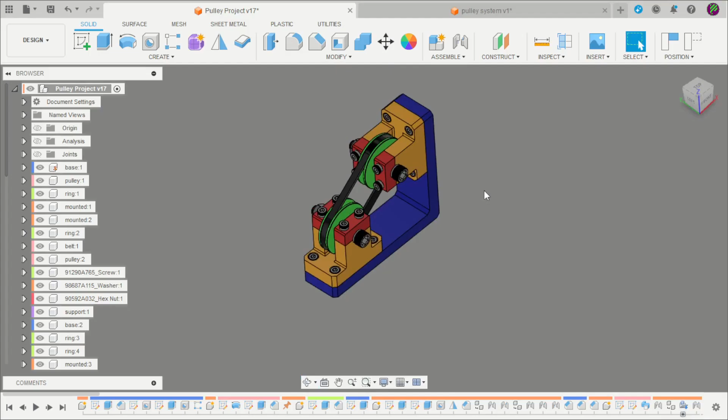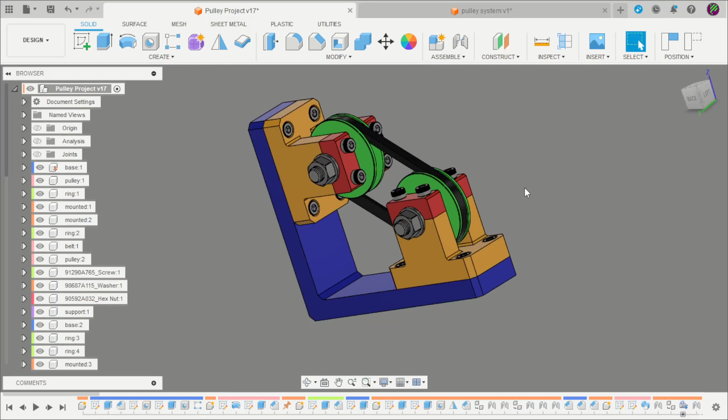This is the video of the assembly of this project. In the previous video I created all the components that we need for this project, and I will show you how to assemble all these components.

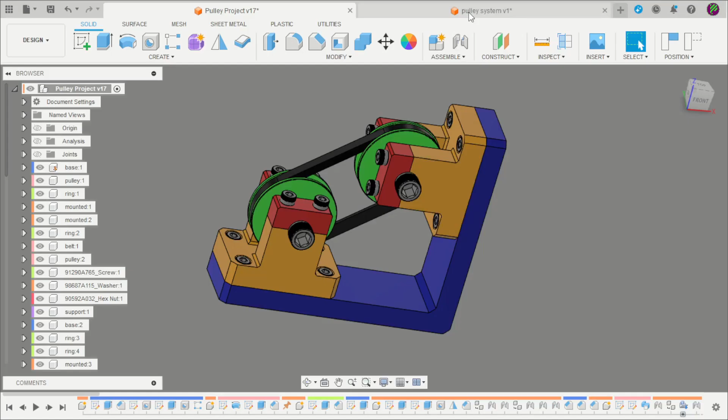Let's start. In the previous video, I finalized all these components and grounded the support here, the first link, here, with the right button, grounded.

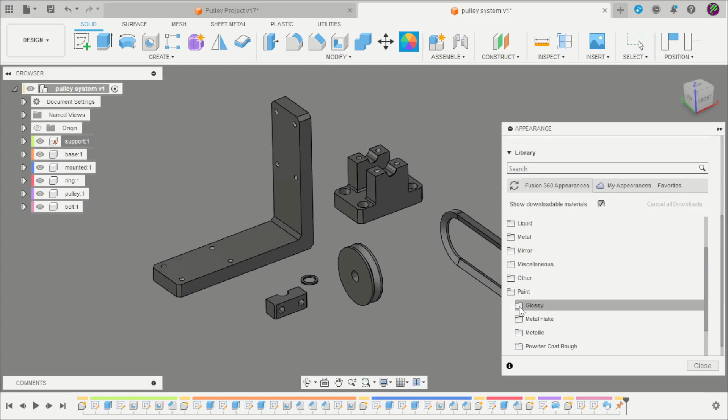Now we can start to add some colors to make it a little bit easier to identify the parts. We can apply some colors here.

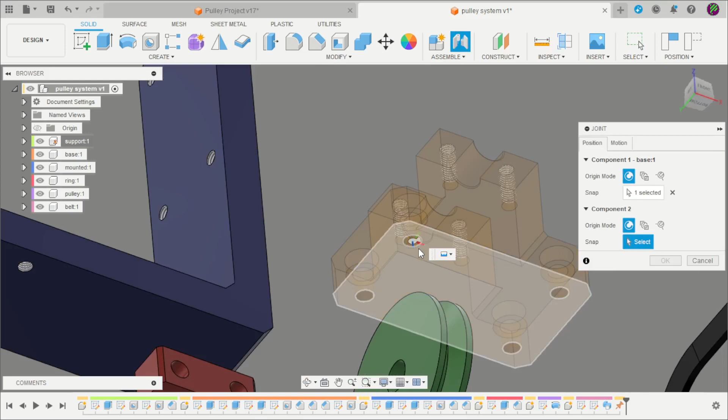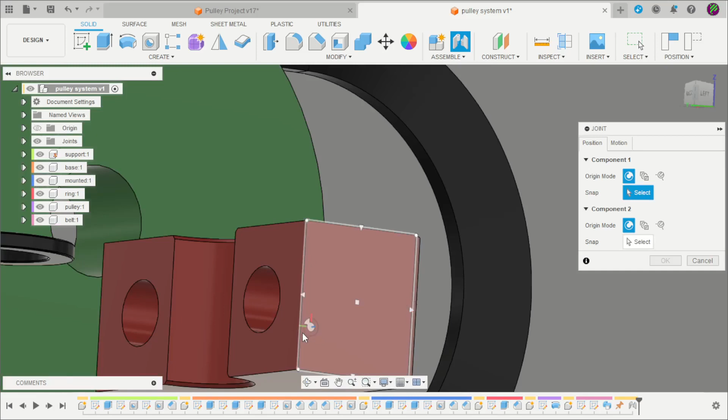Start with the base. Click here. Hold the control, click on the point, hold the control, and click on the point, the part will be moved. We need to click on this point here, hold the control on this cross, move that face and constrain.

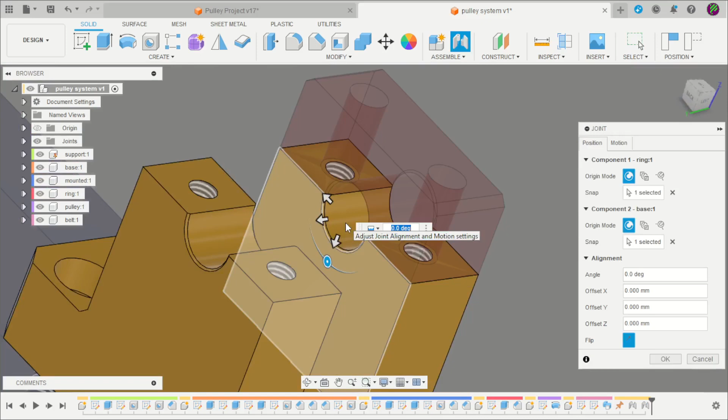This ring, another joint here and here. Click OK.

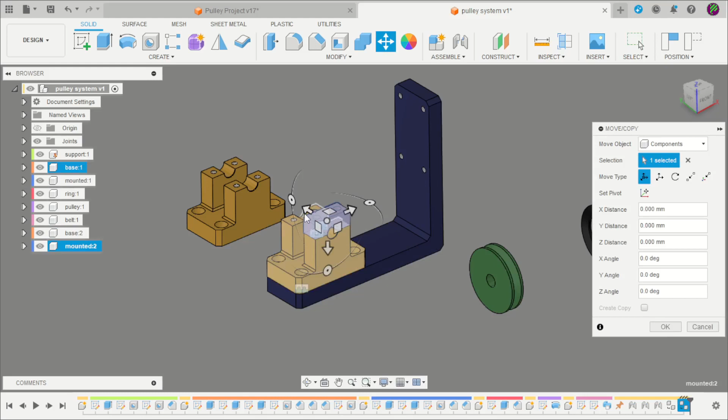Now we can start to create some copies to this product. The base, Ctrl C and Ctrl V, move. The mounted, Ctrl C, Ctrl V. For that we need more copies, two copies, a total of 4 parts. Ctrl C, Ctrl V, that's all the same part here.

The same for the ring. We need 4 of that. Ring, Ctrl C, the same process for all here, and the ring is here.

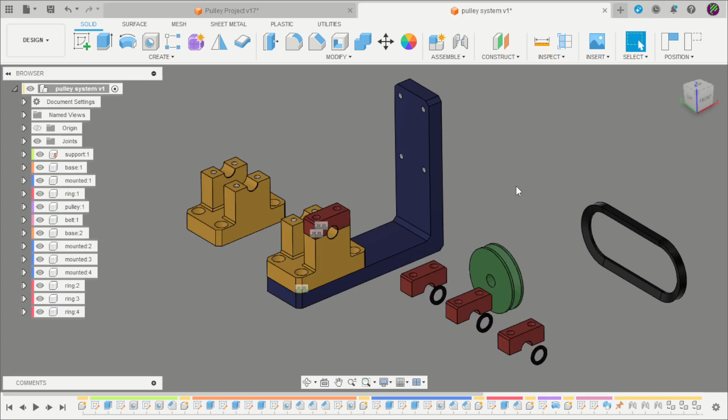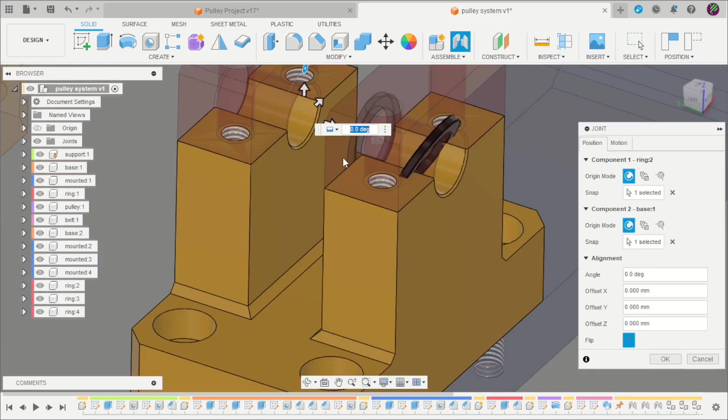Now we can finalize that with this mounted. Click on this point, always using the cross. Here. And here.

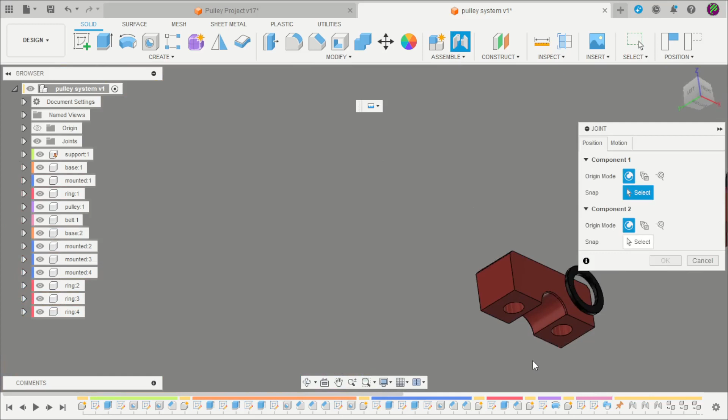Now we can fix that base here on the top. Here. Join all these mounted, using always the cross. Here.

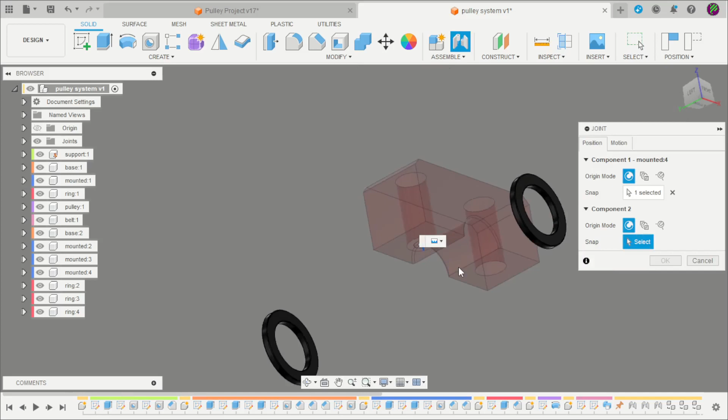In this case we can rotate. Here of the process, turn that as 180 degrees. The same for the rings, here and here.

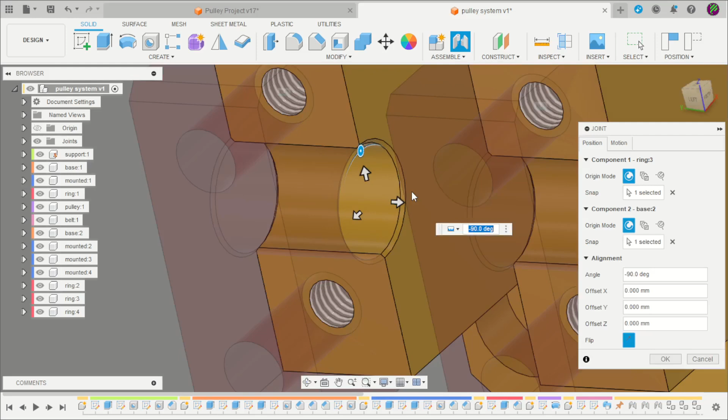And the last ring, let's see.

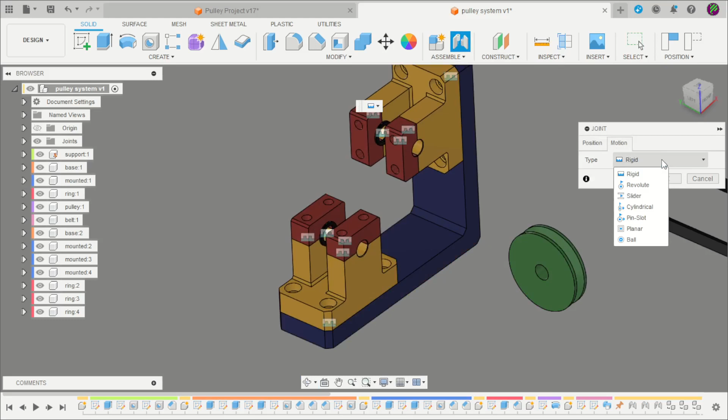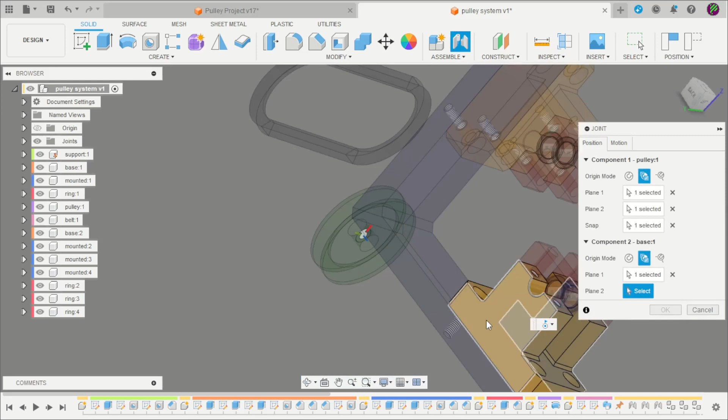Now for the pulley, we can change that to rigid to revolute, and between two faces, because we can select these two sides of the pulley and select the center point of this cylinder between two faces of the base, and click here and select the center point. Now we can rotate this pulley.

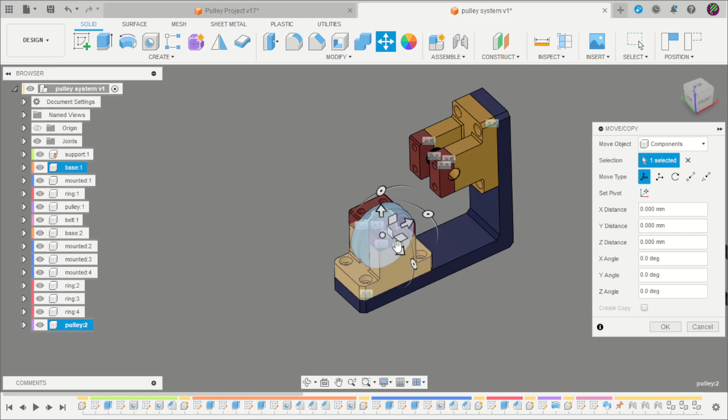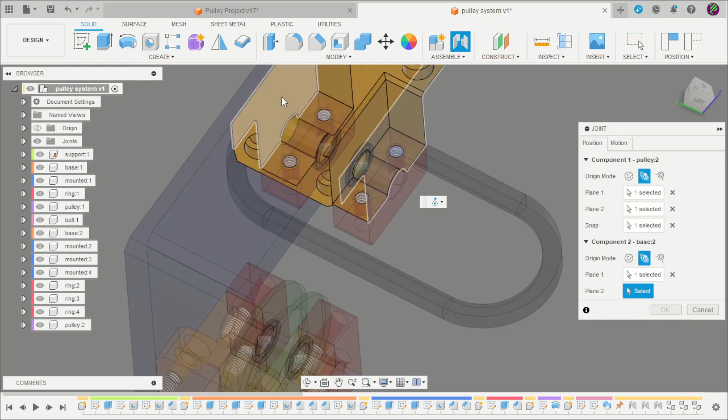The same process for the next pulley, Ctrl C, Ctrl V, create another pulley, joint between two faces, click here, the other side, and in the border to select the center point of the cylinder, change to between two faces here and the border, and finalize with OK. Now we have our two pulleys that we can rotate.

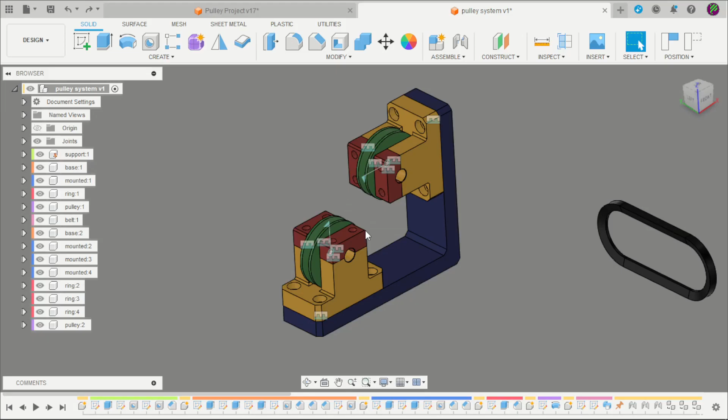Now we can start to apply some screws here to the project. Now in the drawing of the assembly, we can start to copy these codes, Ctrl C, return here to Fusion. Remember, you need to be in the main project. Insert McMaster, Ctrl V. In my case, I can change to step and download the first screw.

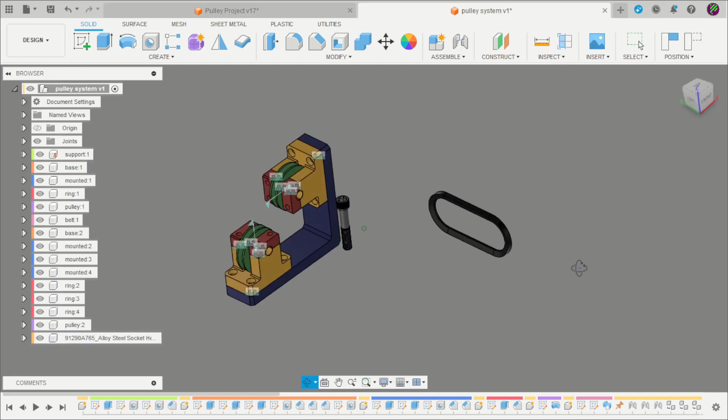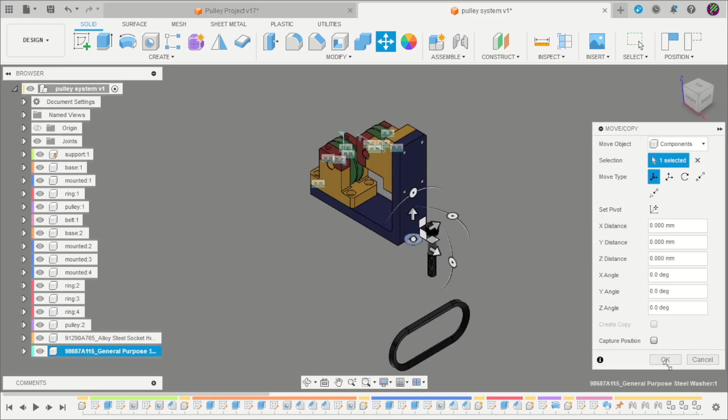Return here to the project, copy this second, insert McMaster, copy and paste the code. This is the washer. Click here.

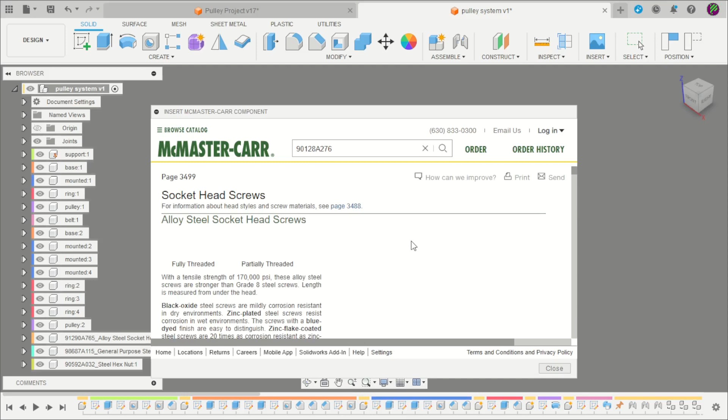Repeat this process with all the components that we need for the project. Ctrl C here, insert McMaster, paste the code, download the nut here, mark 2 times with the screw, paste the code, download these components.

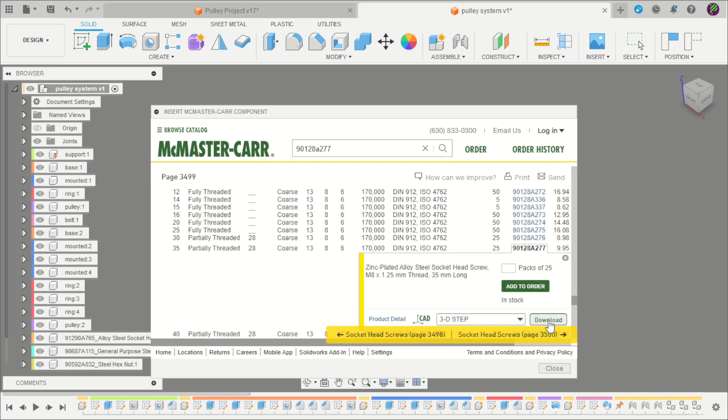Okay, and the last one, Ctrl C, return to Fusion, McMaster, paste this code here and here.

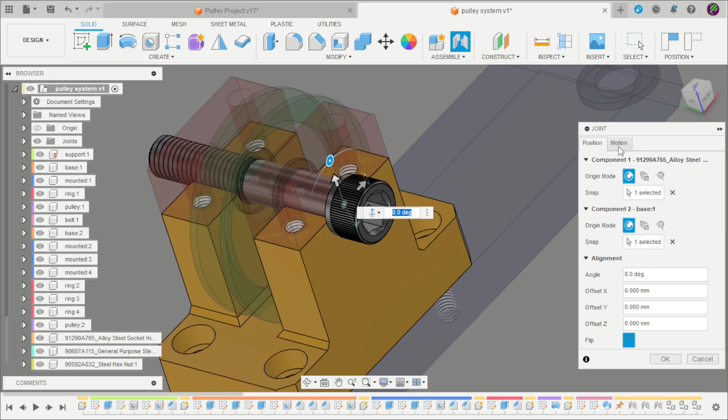Now we can start to join these components. Hit the J, hold the Ctrl, hold the Ctrl here. We can move, we can change to rigid and OK. The same for the washer, here and here. And the nut, here and here.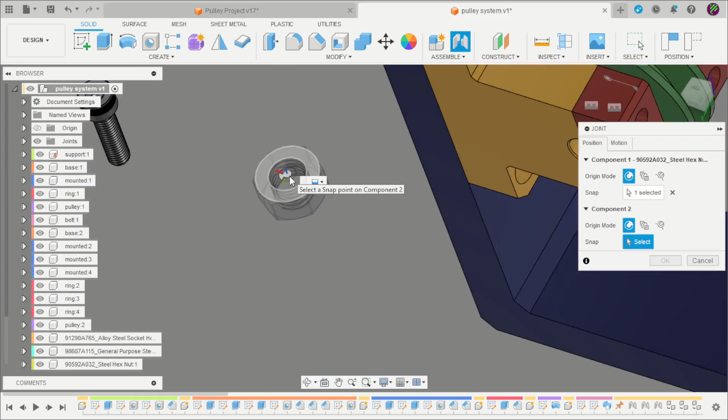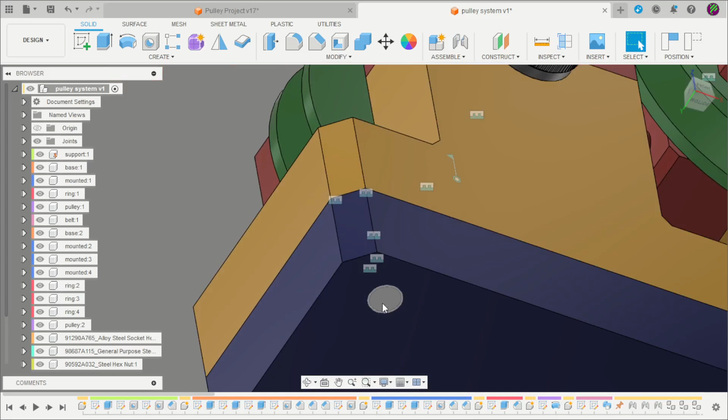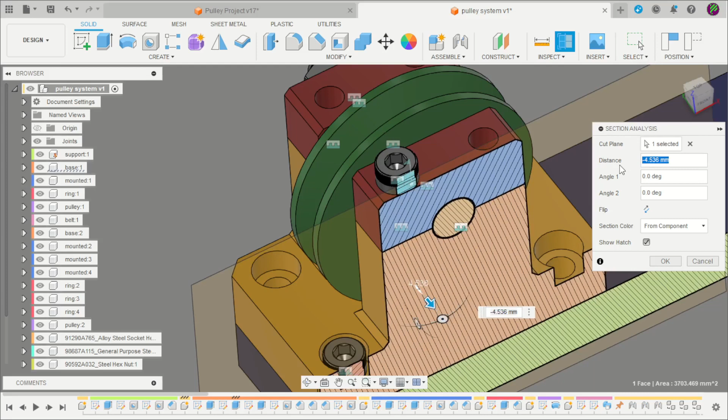This for the base, here and here. That fits with the base. And that, this top here. And we can analyze this component as minus 10 millimeters. All these components are properly fit on this space.

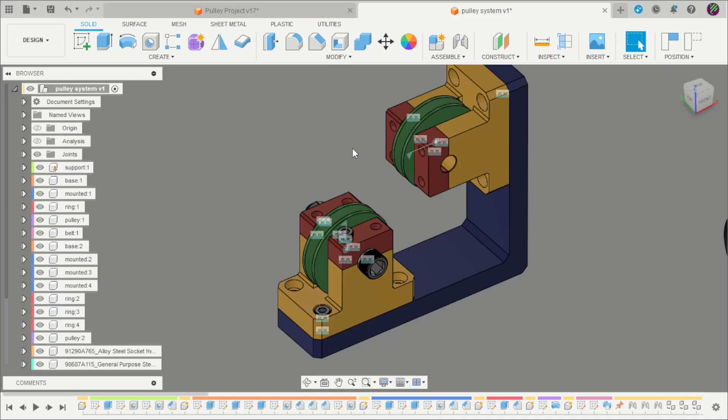Here, hide the analysis. And now we need to copy and paste these screws, nuts, and washers to the other part. I will speed up the video to conclude these parts.

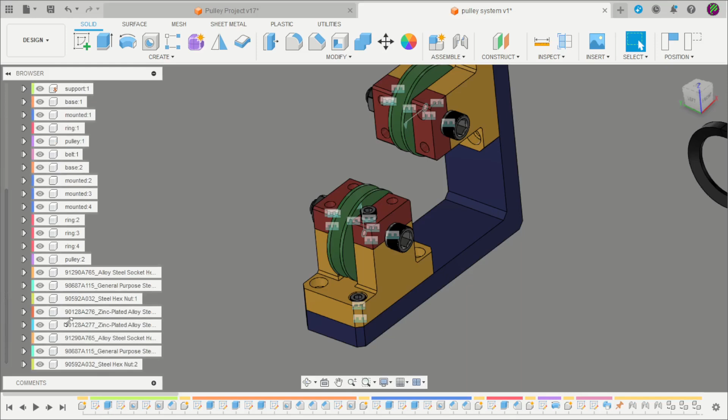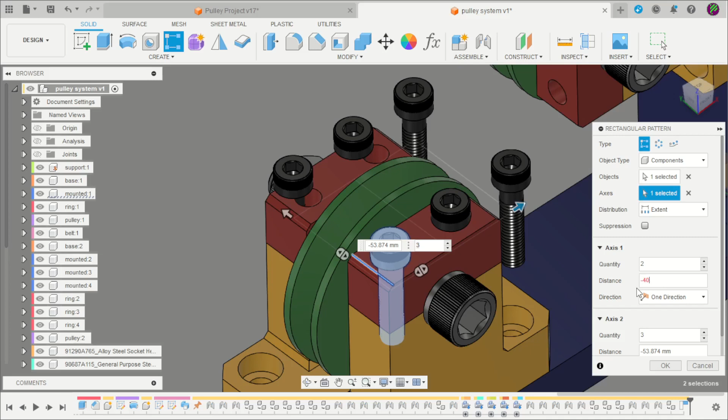For this component, we can select that, change it to component. Here on the rectangular pattern, select this axis, and we can create some patterns here. This distribution is Extent, the quantity is 2, and the distance is -40 millimeters. On this other axis, we can change to 2 and -30 millimeters. Now we have these components.

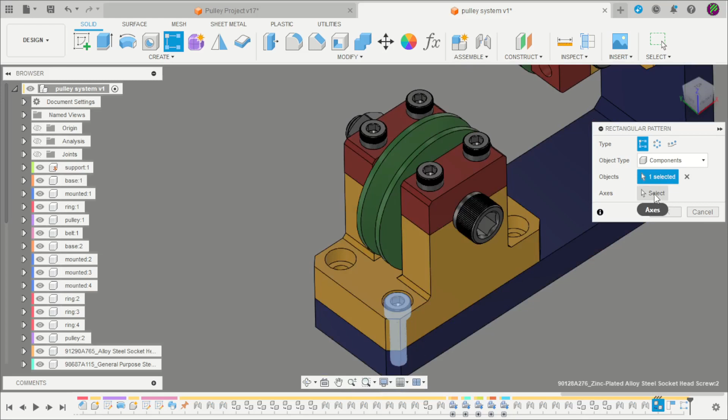We will do the same. Rectangular pattern, components, select the object, select the axis here and here, 40 millimeters, just 2 copies. In the next, just 2 with -75 millimeters. Now we have our component.

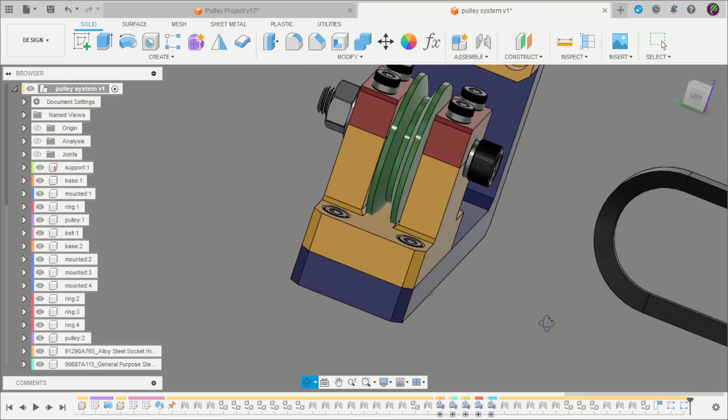Now we can do that copy.

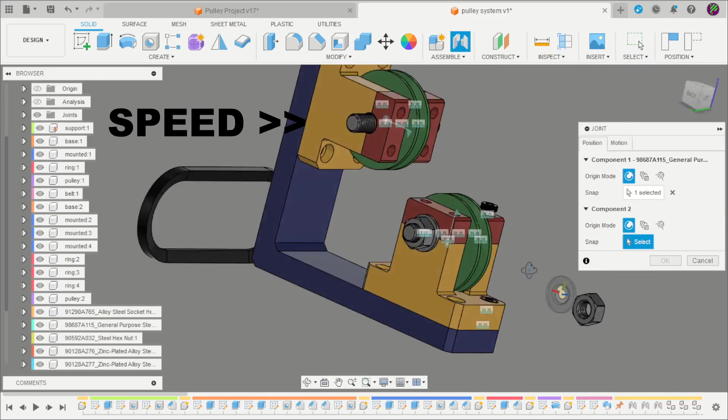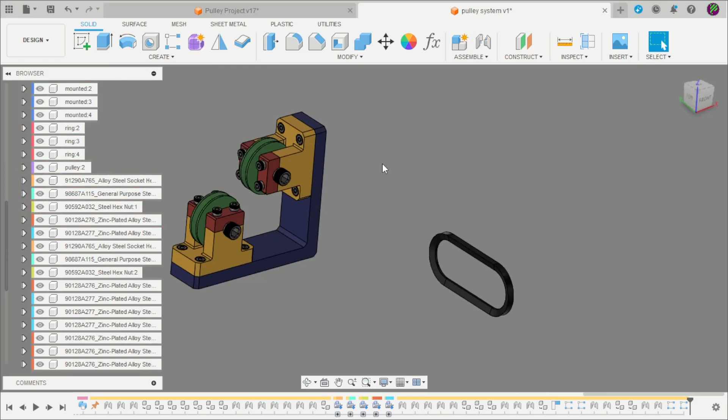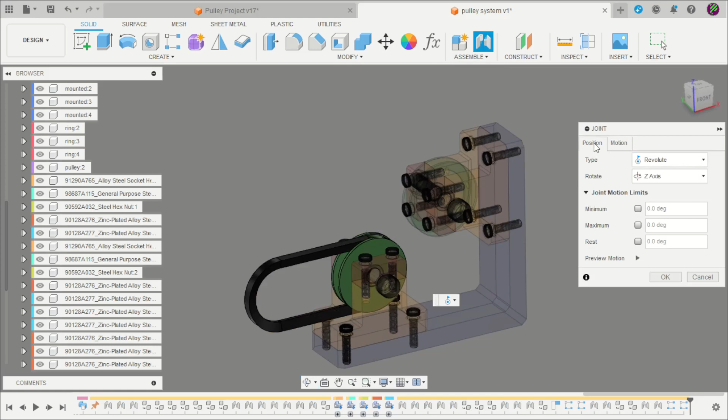Now to finalize this project, we can insert this belt here, select this, hold the control in the middle point, we can fit here, hold the control on the middle point, click, change to revolute.

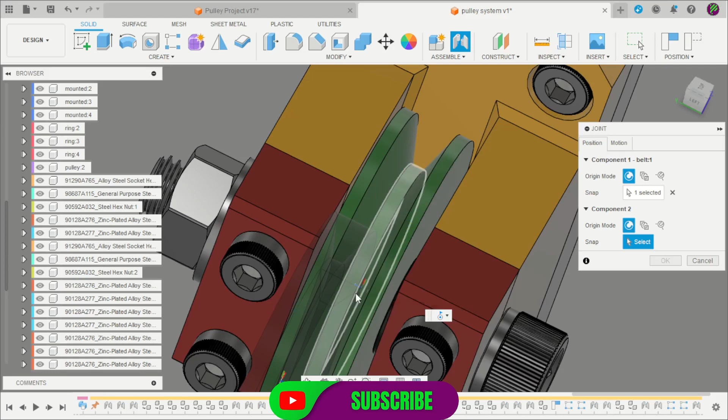Now we can insert J for joint, the same process, hold the control here on the midpoint, pass the mouse for this pulley on the midpoint, we can insert this belt to the project.

Now the project is finished. I hope you liked that. It's a good project to understand how to create components and make assembly on Fusion 360.